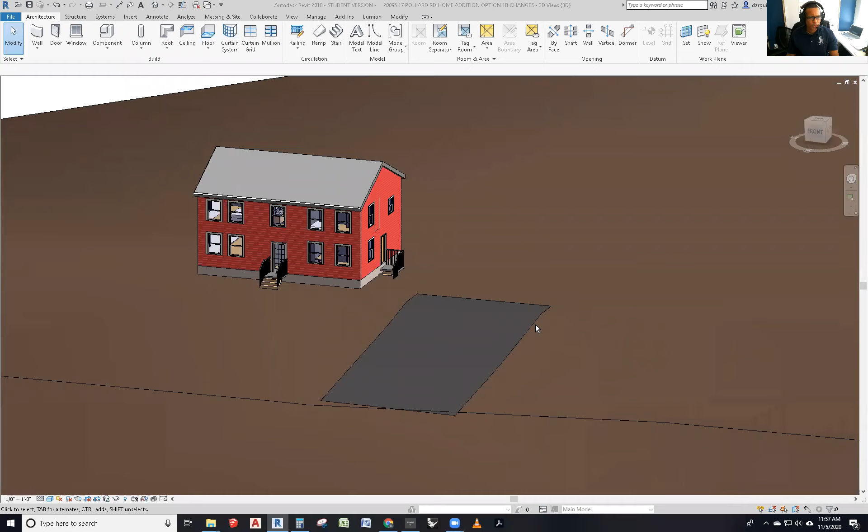All right, so I am going to now demonstrate how to calculate some structures for a simple house addition. As part of this class, we have this Revit model. I also teach Revit, and we've developed this Revit model for a house in which we're going to be putting an addition somewhere in here where you see the driveway. We're going to be sizing several members in there.

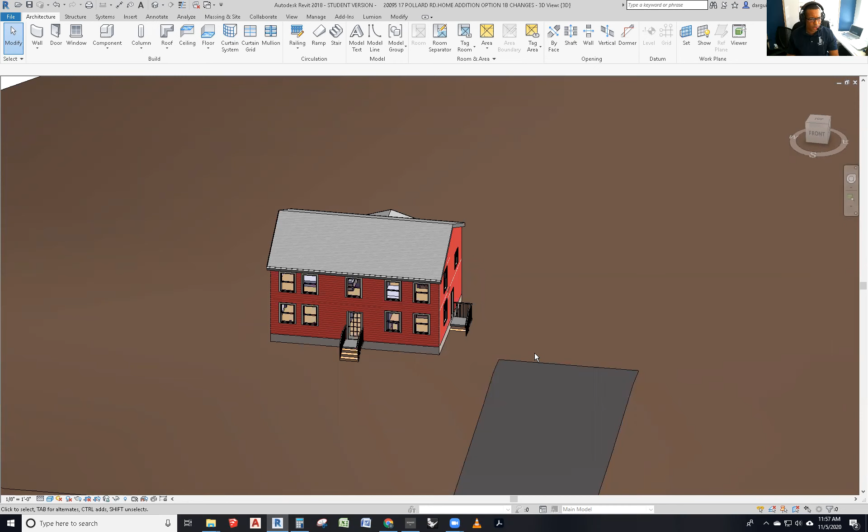They have already been sized, but we're going to check whether they are correct or incorrect and what the process for it is. Here, I'm just going to cover the very basic process mindset prior to sizing the members. So the first thing is I'm going to show you what we're going to be doing. So the addition is going to be all of this right here.

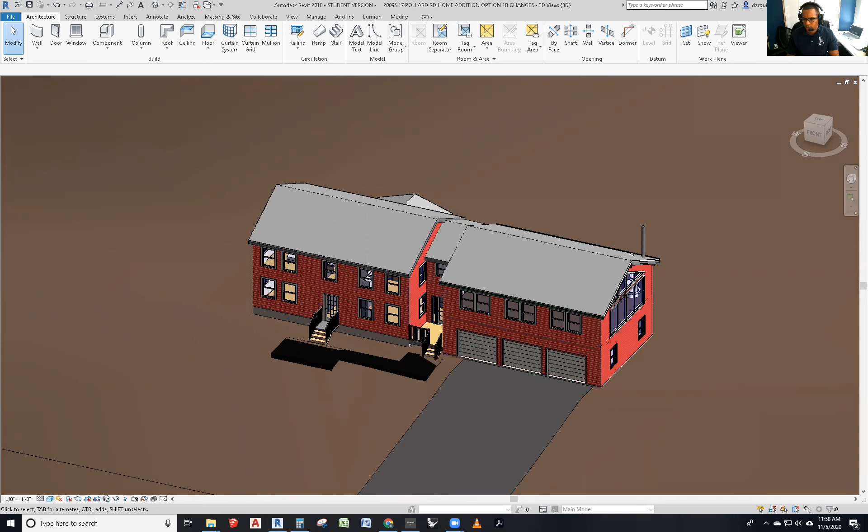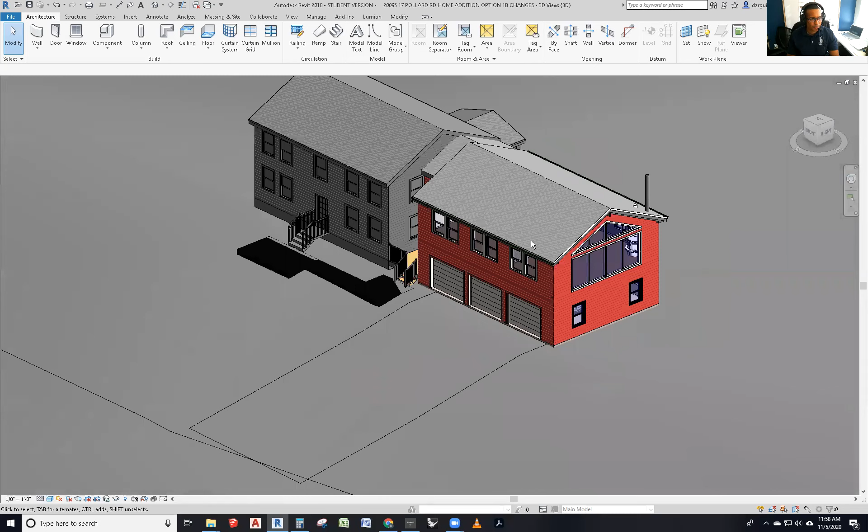If I change the color of the existing versus the proposed, so that you get a closer look at what the addition looks like, it's something like that. So everything that's gray is existing, everything that's red is new. It's a very, very sizable addition. If you think about it, it's actually the same size as the existing house, if not bigger. We're gonna be having a three-car garage in here, a master bedroom above it, and a gable roof with a cathedral ceiling. What do I do?

Well, the first thing I do is I set up a very clean sheet where I show how I think the members are gonna go. This is a mental process. There's no right or wrong way of doing it. It's more like a process as to what's the most efficient way of framing this.

So the first floor, we believe that should be framed this way. So the joists are gonna go this way, and we're gonna have LVLs going this direction, so that we shorten the length of them. So we want to use 2x10 floor joists throughout the whole project, and we're gonna be using at least 1, 2, and 3 LVLs. The first thing I want to know is after I determine how I'm gonna frame it, I like to determine the spans of all of these members.

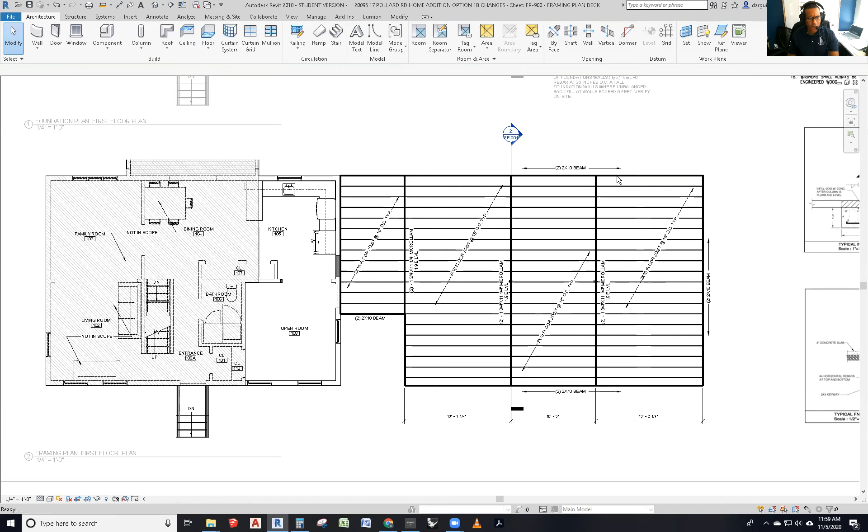So what do I do? I start placing dimensions on the main support members from one to the other. Once I determine this, we know that this 2x10 is going to be spanning 13 feet, this 2x10 is going to be spanning 13 feet, and these ones are going to be spanning 10 feet. Then the other thing I want to know is how long my main support members are going to span, and these LVLs have a length of about 26 feet.

So after I determine that, what I really want to show you is how much each one of these LVLs is actually supporting. And the way to know what they're supporting is very simple. I'm going to be doing a very bold red line to just show you what they're supporting. So this LVL right here, we can call that LVL A. LVL A goes all the way from this spot to this spot, spanning about 26 feet, 3 inches. And it's supporting half of the load from this direction to this direction, because this wall is supporting half of this load.

So what I do typically is I draw a line and show what is my tributary width. That's what we're going to call it. All right. So the tributary width of this member is half of the span of this floor joist. So it's supporting about 6'7" of that side.

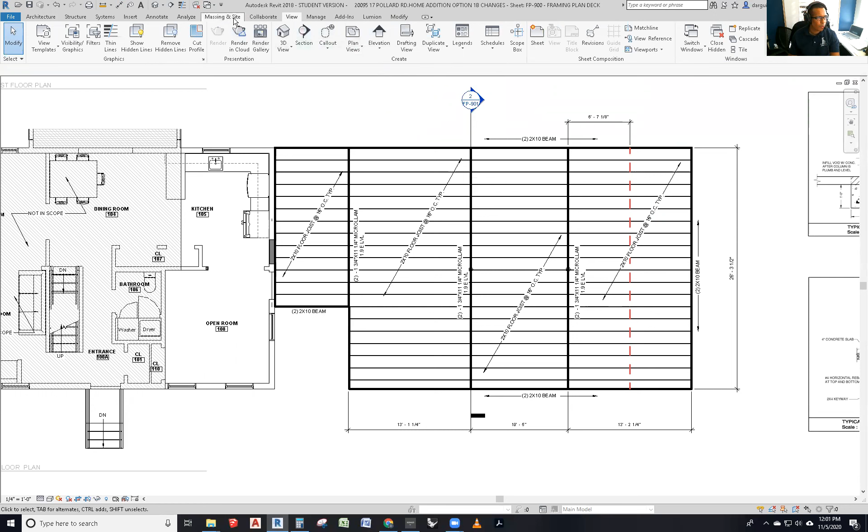And if we do a little annotated line so that we can clarify what that really looks like, it looks something like this. So I'm going to do a hatch and say the tributary width that this member is supporting is this one. That is the tributary width. I'm actually going to represent it. That's actually bold enough. So that's that tributary width. And the same procedure goes for this one.

So what's the other tributary width that this member is supporting? It's supporting all the way from here to there, but it's only half of that that's being supported by that member. Okay, so we're going to be sizing that member right now. So we have tributary width, it's supporting this much. So I do this element right here and say, okay, let me just illustrate it. So it's supporting from here, all the way there, all the way here.

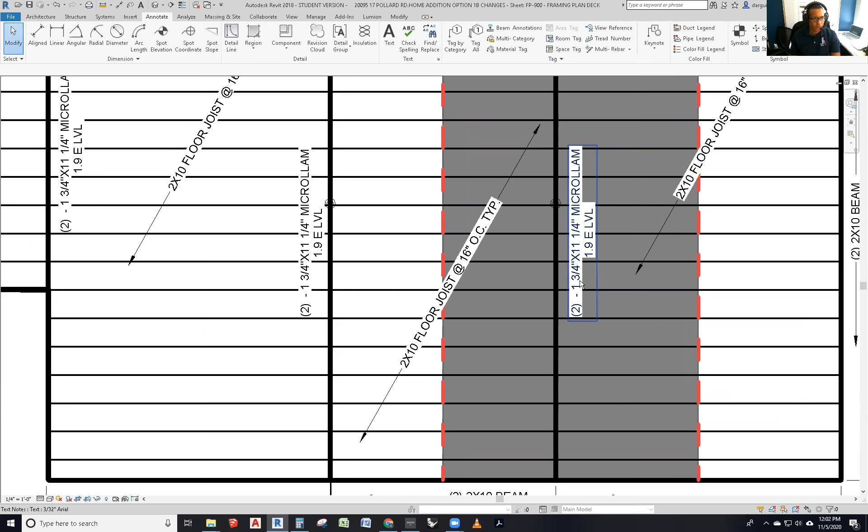So this LVL is spanning 26 feet 3 inches and is supporting 5 feet on one side and 6'7" on the other side. This is the first exercise into knowing what this member needs to be and whether this member is accurate, proper, or not. So I'm gonna hold it in here, and then I'm gonna go into my structural calculation software to show you how I can verify whether these two LVLs, two of them, 1 3/4 by 11 1/4 Microllam, are proper or not, and whether they work or not. Okay.